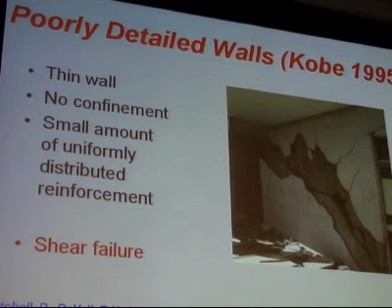So that's one type of severe problem that was very prevalent in the construction of many shear wall structures in Canada in the 1960s—thin shear walls. The problem is they have lap splices in critical locations at the base of the wall, inadequate shear reinforcement that's typically poorly anchored at the ends, and confinement reinforcement that typically doesn't exist. Therefore you get a very poor response. Back then, they weren't really concerned about earthquake design, unfortunately.

So we've done a number of tests at McGill University. This shows the test setup we've been using. We typically have a reverse cyclic loading at the tip of the wall, and the wall is fixed at the base. Notice we're testing it in the horizontal position for ease of testing. This is post-tensioned to the strong floor, and we have guides here to prevent lateral movement.

The series we just finished involves lap splices at the bottom—the most critical section of the shear wall—of 30 bar diameters. We typically use 20M bars in these fairly thin walls, 150 millimeters thick, very symbolic of the problems in current construction. One problem with a very thin wall is there's no way to anchor the horizontal reinforcement, so typically they'd put a 90-degree bend without wrapping it around the reinforcement at the ends of the walls, which is totally inadequate.

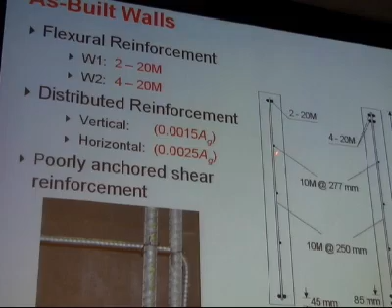We did 2 walls in the as-built condition: one wall with 2 20Ms at each end, and one wall with 4 20Ms at each end. These have the lap splices, and they have typical amounts of vertical and horizontal uniformly distributed reinforcement.

The responses of W1 and W2 didn't reach yield. If it were monotonic loading, they may have reached yield and had some ductility, but because of the reverse cyclic loading, we get a brittle type of shear failure with inadequate energy dissipation for both W1 and W2. W2 had a larger amount of flexural steel and therefore has a higher capacity, but both are inadequate in terms of performance.

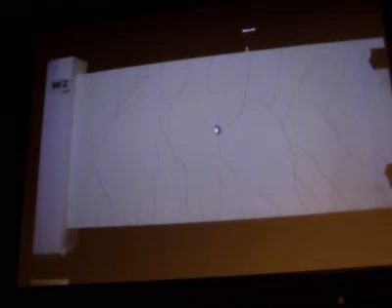Now I just wanted to show you what one of these tests looked like. We're loading up and down on the right-hand side, and you will start to see the flexural cracks forming, and then some shear cracking, inclined shear cracking, forming. Eventually we'll see the lap splice failure in this region here. It didn't move very much - it's not very ductile. So this is the brittle type of failure you get with this type of construction.

We looked at a number of ways of improving this. As I said, the walls were tested in their horizontal position, and we used carbon fiber wrap. We rounded the corners, roughened the surface, and wrapped the carbon fiber around the walls. It's a very easy solution. We did it over the probable plastic hinge region with a little bit of extra, using the carbon fiber wrap with the fibers in this direction, in strips as well, to give improved shear response.

The other type of retrofit we did was a more serious retrofit job. We took the 2 specimens that had failed under reverse cyclic loading and actually repaired them, but it also represents a retrofit procedure where we put some fiber-reinforced self-consolidating concrete over the lap splice region, adding it to the wall, not lengthening the wall, because architecturally that's sometimes very difficult to do with the retrofit. Then above this, we have the CFRP wrap and the shear straps.

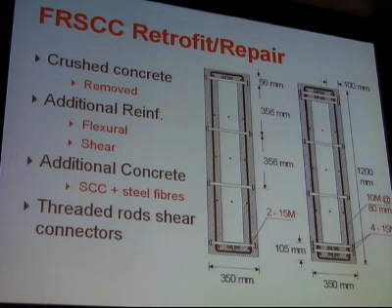In terms of the retrofit, it's quite a serious job. It involves removing some concrete at both ends, putting hoops around this area, and not lengthening the wall. This is removed concrete that's being replaced with the fiber-reinforced self-consolidating concrete. We have through bars, which give the shear connection as well, and longitudinal reinforcement, which increases the flexural strength to make this a capacity-protected zone.

We also looked at a 5-story prototype structure to be able to predict what these different retrofit scenarios would give us. This 5-story structure had 12-foot high story heights - we're using imperial units. It's 1960s construction, a shear wall frame, with deficient shear walls - thin shear walls with inadequate anchorage of the shear reinforcement and lap splices at the base and at each story. It's a frame associated with it which has limited ductility, so there again is a problem.

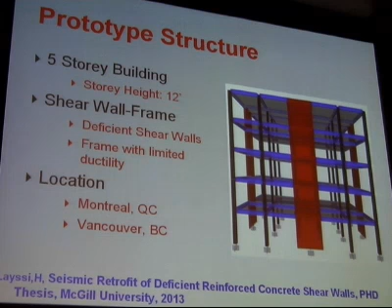We would like the walls to protect the frame. We looked at 2 different locations, putting this structure in Montreal and having the same structure in Vancouver. The wind loading, which would have governed the design back in the 60s, was fairly similar in Montreal and Vancouver, so you could have had very similar structures in those 2 cities. We used a uniform hazard spectra for 2% in 50 years for Montreal and Vancouver, as well as the 10% in 50 years, to look at different performance requirements from the walls for different seismic hazard.

The conclusions from these analyses: we did the nonlinear static procedure, which involves a pushover analysis. It's nonlinear, using the fiber models, and we also used nonlinear dynamic procedures with a suite of 12 earthquakes for each analysis. The results are rather interesting, and it worked out rather neatly.

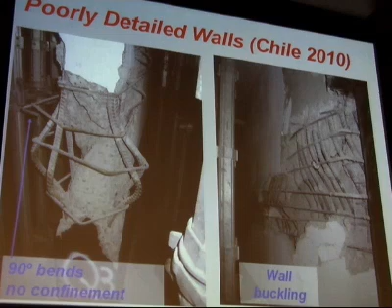And the walls that we examined varied from 175 millimeters to 250 millimeters. You cannot put confinement reinforcement in a wall that's less than about 200 millimeters. It's just impossible—you'd have to have a jeweler make the cage to put a confinement reinforcement cage in at the ends of the walls.

So these are the details that existed in Chile: there's no confinement reinforcement, and there's the 90-degree bend anchorages. And this is what we would use for our very ductile walls in the CSA standard, having confinement and having this horizontal shear reinforcement well anchored in a confined region.

This takes me back to a building that was being evaluated in the year 2000 by an up-and-coming firm, Tipping Mar, out of California. Their problem was that they needed to retrofit this building. It has two shear wall cores—coupled walls in one direction and ductile walls in the other—but they weren't actually ductile. They had lots of problems with the detailing.

The floors are hung off the top of the building, so it's very clear that the structural seismic force resisting system is the shear walls—that's the whole meat of the structure in resisting lateral loads. So we helped this particular project by carrying out a series of tests to mimic the poor details in the shear walls and look at ways of improving those details.

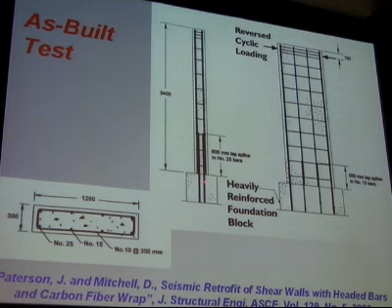So we were looking at lap splices at the bottom of the wall in this particular case, and we did two different types of specimens. The problem in the shear wall they had is that you've got lap splices at the base and at every floor level. So we were simulating the lap splices at the base with this test, and we were moving the lap splice up higher to look at this case—still in a very high moment region, but perhaps getting some yielding at the very base. So we looked at those two different scenarios with these very poor details of the reinforcement.

Interestingly enough, when you move the lap splice up a bit, you get some improvement in the response.

We were looking at this because they really wanted to make sure there were no problems with these shear walls. So we looked at retrofit procedures. In this case we weren't using self-consolidating concrete or fiber reinforced concrete, but we were looking at a reinforced concrete addition at the base over the lap splice length.

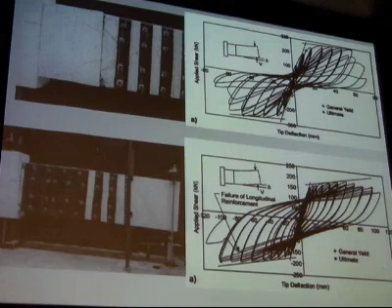That was a very interesting project to work on, and this now appears in the current draft of the 2014 CSA Standard Design of Concrete Structures, in Clause 21, which gives the recommended details for reinforcement for different ductility levels.

So thank you very much for your attention.

Our code is going more and more towards displacement-based design for concrete shear walls, and therefore you need to estimate what your displacement demands are. To do that, typically we use a linear dynamic analysis, and we need to use an appropriate flexural rigidity to account for cracking. This is an expression that's been around for a long time, and when I first looked at this subject, I thought it was a great expression. Actually, Tom Paulay came up with it, and it's currently used to analyze buildings and to estimate displacements.

So, using about a 30% reduction. What's happened there? It's coming back now, I guess. Is it? Dennis, you've stopped the stopwatch, have you? Oh, no, I haven't.

Anyway, so you're typically using a 30% reduction on the flexural rigidity based on an uncracked shear wall. So you're using 70%. That's a very typical number that we're using today.

And we've done quite a bit of work on this. In fact, a lot of the work I'm going to show today comes from Ehsan Dizdar, who's actually sitting in the room here. Put your hand up, Hassan. A lot of the work you'll see here is actually coming from Ehsan.

So hopefully this isn't going to keep happening, is it? I keep hearing there's like a tone or something. I see this is the first time we're using the other laptop. Is that the problem?

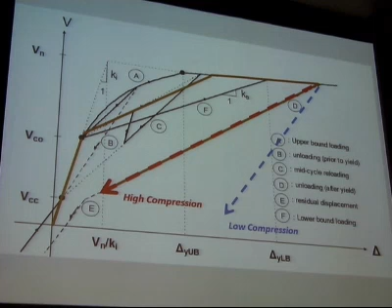But if you look at the full response, and in particular the hysteretic response, what happens is a wall with high axial compression has very little energy dissipation, because when you take the lateral load off, it stands up straight. Whereas if you've got lower axial compression, you dissipate more energy. You get more hysteretic damping. And that turns out to make a huge effect.

Any idea what's happening, Stanley, or no? I don't know. Yes, Tony. Nope.

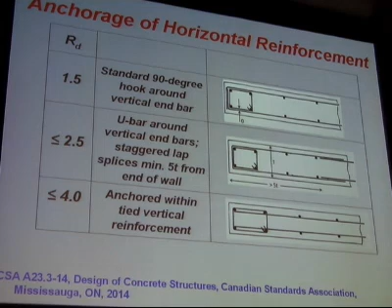Sorry? Yeah, okay, I won't miss that part at the end. There's a bit on rocking foundations. Okay, thanks, Liam. Actually, Liam, all the work I've done is original work. What did you just say? It's oh, right, the rest of it's not very original, just original. Thanks for that, Liam. No, I don't. No, there's no video, there's a few tiny animations, but one I just... No, I can't be doing the problem, right? You want me to load it up anyway,

Just in case, yeah, copy it on there. Maybe I'll just start with yours. Sorry? Yeah, we can work like that. Sure, people can see it, right? So it works better if we just stay like that? No, it doesn't, it does the same thing, right? Yeah, let's switch to Dennis here. Can you switch it to his computer?

Okay, so let's hope for the best. Thanks, Dennis. So you can start the clock again.

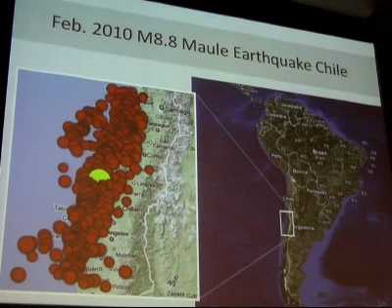Okay, so Dennis talked about some of the observations from the Chile earthquake, and I'm going to talk, as I said, a bit more about some thin wall failures.

Here's an example of one that's really a column/wall, but it was thin, and these are typically 150 millimeters, a lot of them. There's another one that failed at the end of a shear wall, crushing all along the end of the wall, and here's another example.

So as Dennis already mentioned about the lack of confinement and anchorage issues, but as I said, I want to focus on one failure mechanism, which I believe is very important, which is flexural compression failure of these walls.

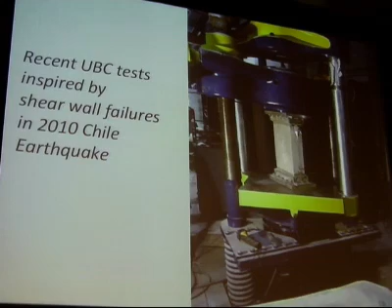And these were some little tests we did at UBC, and this is what the specimens looked like. I just want to focus in on two of them, the type 3, which has some very nominal ties, not what you would call confinement ties, but very light ties, the kind of thing you'd put in a non-seismic element, just minimum column ties.

And the type 2, which doesn't have anything connecting the two layers of reinforcing steel. There's two layers of small bars in a 150 millimeter wall, which is what we saw in Chile.

Here's exactly what you might expect. The type 3 elements respond like a concrete cylinder. You get out to strains of 4 parts per thousand before it finally crushes, and even then it's quite reasonably ductile.

So very nominal ties, very light ties, make it behave like we'd hope. These elements are in pure compression. Here's a type 2 element, which we've started to load up, and there's none of these nominal ties. We get up to this point, so far everything looks great. We're up to 30 MPa average stress on these elements, so we're getting close to the peak compression strength.

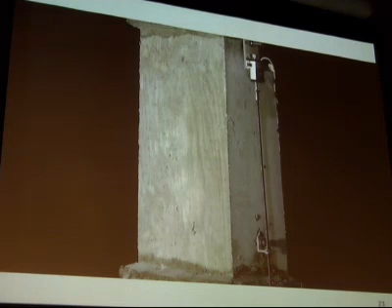Here's what the element looks like. If you look closely, you can see a little bit of damage at the middle there, but all of a sudden it completely explodes. The first time we saw that happen, I thought there was something wrong with the test setup, but when we saw it happen many times, we realized there really is a phenomenon here.

Now we've also done a study on columns and walls. These are gravity columns and gravity walls, these are the four column specimens. We also did a fifth specimen like the bottom one, but without the cross tie, so it's a wall. If we look at the top two, I was surprised to see how tough these gravity columns are. These are gravity columns with nominal gravity ties, not seismic detailing, and we couldn't break them.

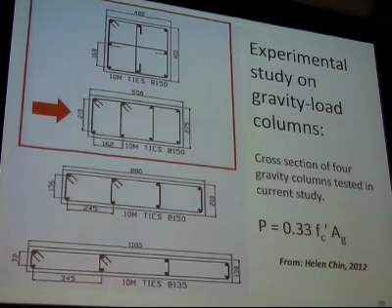If we focus on this column and look at what our predicted displacement capacity was, it was much greater in the experiment. Essentially, we couldn't break it. We crushed all the concrete on the outsides, but it still carried the load, and it had a heavy load, 33% of F prime c Ag.

The reason it works so well is because in this middle zone, you can crush all the concrete here and here, but this middle zone, which has some nominal ties around it, continues to carry the gravity load. So we were really surprised at how good some of these gravity columns can be, and that's of course great news.

But these elements have a certain dimension, like the square ones, or rectangular shapes where it's no more than 3-to-1. Once you get to the slender walls, once you start getting to 4-to-1 or 5-to-1, it's a completely different animal. And what we see happening in those is exactly what we saw happening in those little element tests.

Here's an example of the wall specimen. We're loading it up, a little bit of damage, and all of a sudden it goes bang and it's gone. Complete load capacity is gone, and the failure mechanism is exactly like that element — it goes right through the thin wall and completely loses all its axial capacity.

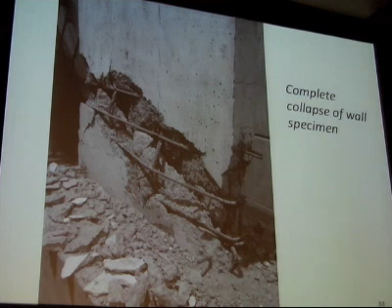To me that's a big worry, because as Dennis mentioned, we've got a lot of these thin walls around, and even today people are building 6-inch walls in Vancouver in high-rise buildings as columns. It's not unusual in Vancouver — not every engineer, but some of them are.

Here are some of the changes we've made as a committee to address this issue. Number one, in Clause 10, we've reduced the axial compression capacity of thin elements to reflect that failure mechanism I just talked about. So with thin elements, you don't want to be loading them up too high. Right now people are loading them up much too high because they don't have the toughness.

The other thing we've got to be really careful of is limiting the compression strain. I'm actually not a big fan of confinement. A lot of people think you've got to confine everything, but I think you just need to avoid the large compression strains, and then you don't have to confine it. If you're going to have high compression strains, you've got to confine. If you keep the compression strains low, then you don't actually need to confine.

Significant. You do need, as Dennis showed, some sort of nominal ties at the end - that nice diagram Dennis showed at the end there.

The other thing we've got to watch out for is because we have a lot of thin walls in buildings that people call bearing walls, I worry about those failing in a seismic event. So that was thin walls.

So Dennis, how much time do I have? I've got to figure out... Okay, I think I got another 20, right?

So this is just a quick topic so that Patrick and I can have a debate over lunch. This is a topic that Patrick and I have discussed, and it's an interesting one. Five to six years ago, when we were starting work on the code, I thought the biggest job we had to do was change the whole philosophy of how we design shear walls.

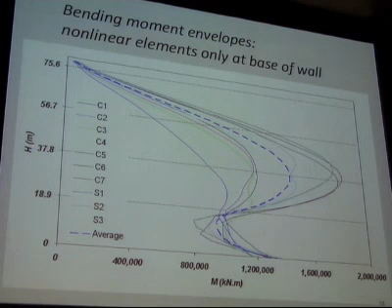Five or six years ago, I thought, boy, we really have to change the code because we're going to develop hinges at mid-height, and that's a problem.

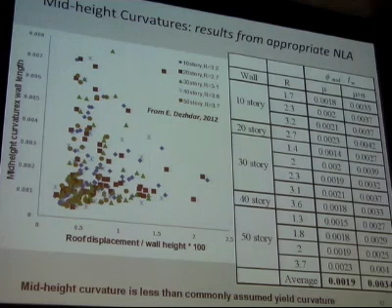This is a bunch of data, again, from Ehsan, where we're looking at curvature demands for all different buildings. This value of curvature times wall length, this is what we assume to be the yield curvature for the wall. In other words, most of the data is below what we assume to be the yield curvature.

And in fact, if you look at the table on the right, for the mean plus 1 standard deviation result, the curvature times wall length is less than a typical assumed upper bound yield curvature. So the summary is that, in my opinion, we don't need to provide special detailing at the mid-height of the shear wall, and in fact we haven't added that. We do need to be careful primarily about these compression failures. This relates to what I talked about earlier, that we don't want to have large compression strains in the wall. Some people advocate the idea of actually preventing the yielding, and I'm actually against that. I think a little bit of yielding at mid-height, at small curvatures, is a good thing because it helps reduce the shear demands.

And speaking of that, I'll go to design shear forces very briefly. Our design shear force is our elastic shear force multiplied by a couple of things. Essentially, we adjust the shear force based on the bending moment. We use the same reduction factor as we do for bending moment. And then we amplify our shear based on the actual bending strength. That's something we've had in the code for a long time here in Canada, and it's very good.

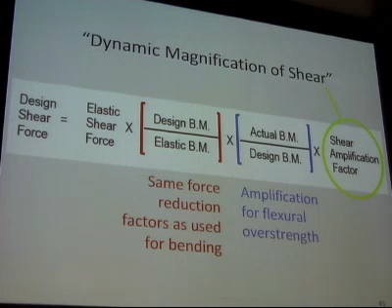But there's another factor, an amplification factor to account for the fact that the higher mode shears aren't linked to the flexural capacity. A lot of people have done work on this, including Patrick and Robert Tremblay. I don't know if he's here yet, but Robert's done work on this. And many people have different solutions. My own conclusion is that a lot of the suggested amplification factors are too large because people have used a bad model and have used the wrong selection and scaling of ground motion.

Here's an example, again, of the shear envelopes you get. The red line is the shear envelope from an elastic, perfectly plastic model. The blue line is what you get if you just simply use a trilinear model. So you get a significant reduction in the shear due to the cracking, flexural cracking that occurs near mid-height.

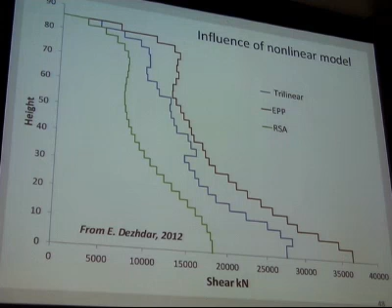First of all, we've seen very few shear wall failures in actual buildings. The higher mode shear forces exist for a very short time, and by the time something starts to happen, the shear force turns around. Nonlinear analysis has shown that walls have shear ductility, and we've seen that in a number of studies. An important point is that the maximum base shear force and the maximum base rotation, and the base rotation reduces shear capacity, they don't happen at the same time. The largest shear force we're looking at happens once in an earthquake; the next cycle, or the next highest shear pulse, will actually be significantly lower.

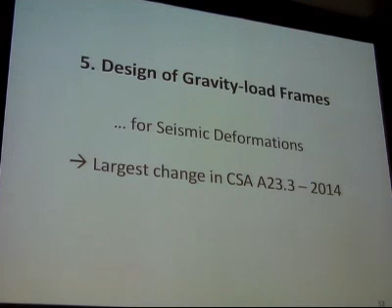Here's the biggest single change we've made in the code: a new section on the design of gravity frames. One of the things we've done badly in seismic design of buildings is identify a piece of the building, the wall, as the seismic force resisting piece. We do a really good job designing that wall and making it ductile, and the rest—well, that's the gravity load system, so let's not worry about it, since it's not carrying the earthquake forces.

The problem really comes from thinking in terms of forces. If it was a force problem, that would all be great. But here's a beautiful example.

We need to think about the displacement demands on the gravity frame system. We've done a lot of work on that for our Canadian code—we have a large new subclause dealing with this issue, and there's more work to be done. One important thing is getting a simple estimate of the displacement demands on the gravity frame, and we're doing that using the interstory drift demands.

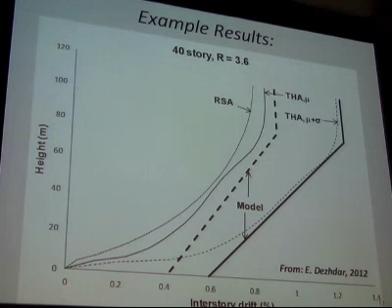Here's an example of Ehsan's work where nonlinear analysis shows what these interstory drift envelopes look like, both the mean and the mean plus standard deviation. We've used these results to come up with a simple bilinear variation of interstory drift. At the base, the envelope comes to a significant value, even though results show very little drift at the base when only modeling flexural deformations. The difference comes from shear deformations, which are very significant in a hinge—you get a lot of interstory drift in a plastic flexural hinge due to shear.

So what we've got in our code is a simplified method of analyzing the gravity frame using this simple interstory drift ratio envelope defined in the code. You come up with it quickly using a linear dynamic analysis with effective flexural rigidity, accounting for things like torsion and accidental torsion, and now including foundation movements. This is really important: any movement in your shear wall foundation probably won't hurt the shear wall much—it's just going to rotate over—but it will put huge demands on the gravity frame.

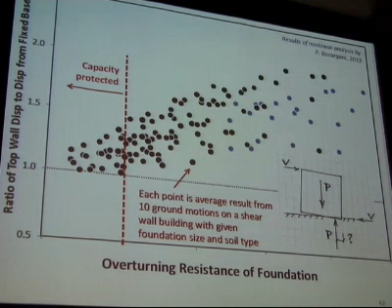What surprised us was that capacity-protected foundations—where the wall is made weaker than the foundation—still give very significant movements. Of course, if you let the foundation rock, not protecting it through hinging of the wall, you'll get even larger displacements. In our Canadian concrete code, consistent with the draft 2015 NBCC, there's a statement that the increased displacements due to foundation movements shall be accounted for in the design of the SFRS, and perhaps more importantly, in the design of the gravity load frame. That's in our Canadian concrete code as well as the NBCC.

And now, how do you calculate those displacements? I'm not going to spend much more time on it, but I'll tell you we've been spending a lot of time coming up with simple ways to do that.

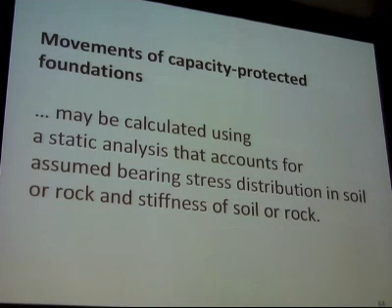So for capacity protected foundations, what our code says is you can use a simple static analysis that accounts for the bearing stress distribution and the stiffness of the soil or rock.

And I'll stop there. There's a little bit more about rocking footings, but I'll end there because I'm taking at least my time—sorry about that, Dennis. No, that was great. Sorry about the mechanical problem.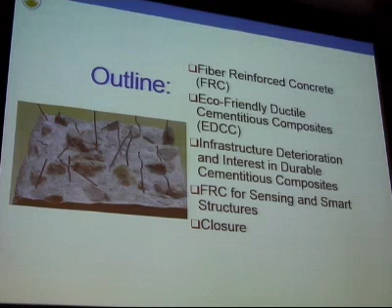So fibers that go into concrete are of several types: steel, polyester, high-density polyethylene, cellulose, carbon, basalt, and the list goes on. There are a number of fibers that are produced—it's a huge industry, almost about 500,000 metric tons of fibers utilized in concrete these days.

You can also produce SIFCON. SIFCON is a material where you produce a bed of concrete, then add a bed of fiber, and then pour cement slurry. The defense industry uses a lot of this material because it's a highly energy-absorbing material.

And finally, you could also produce it by the spray process. This is how a lot of GRCs, glass reinforced cement products, are made. A number of buildings on the campus have GRC cladding, so this is how these materials are actually produced.

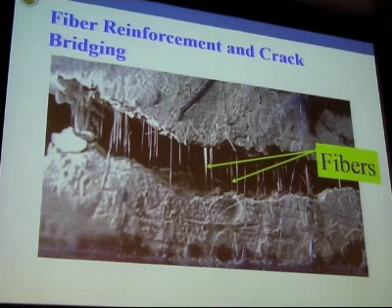The crux of the matter, the primary mechanism by which you can make a material absorb a lot more energy, is the fiber bridging effect. If you have concrete without fibers, once you have a crack, it would have very low stress carrying capacity. The moment you have fibers in there, you have a stress carrying capacity across a crack, which we call a residual tensile or residual compressive capacity. So you get this kind of response.

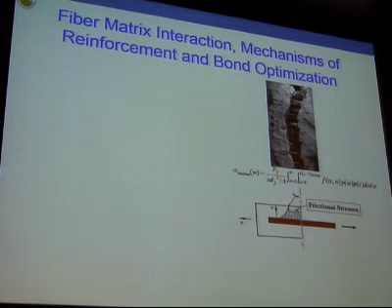Because you're trying to reduce or maximize its pull-out capacity, while making sure the fiber doesn't fracture in the process, a number of models have been created to analyze these fibers. A number of patents have also been generated for designing fibers which pull out at the highest resistance but do not fracture in the process.

A fair bit of work has also been done on the surface chemistry itself. If you look at any particular fiber, it would have a very high contact angle with water. What we're trying to do is coat these fibers to reduce that contact angle, making the fiber highly hydrophilic. When a fiber becomes hydrophilic, it absorbs a lot more energy and achieves a better bond. You can see these polypropylene materials which have been treated with plasma, which can reduce the contact angle quite substantially.

Over the last 30 years, a number of new techniques have been generated to increase the performance of one single fiber, so it pulls out at a very high force without fracturing. Other methods include fiber deformations, silica fume use, surface modification, and surfactant use. These studies have allowed us to generate fiber reinforced concrete materials with the type of characteristics I call an elastoplastic response.

So if you look at all of the work that has gone into generating fiber-reinforced concrete or optimizing these materials, 30 years ago we would have had a softening response, or a deflection softening response. But by understanding the mechanisms of these materials, what we can now get is what we call a strain hardening response, so you can get a material which almost behaves like steel.

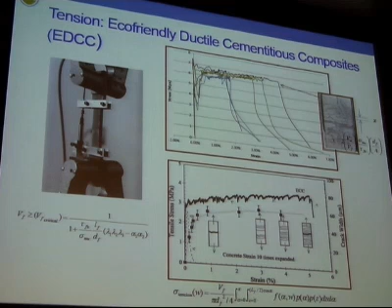Cement, as you know, is a very dirty industry, producing up to 7% of global greenhouse gas emissions. So in these composites we are trying to reduce cement as much as possible. Clearly, these are quite eco-friendly, and they are also highly ductile.

Now, coming to earthquakes, and how we fit into this understanding of strain rate effects in concrete. If you look at what happens during loading: quasi-static testing is around 10 to the power minus 6 strain; traffic is 10 to the power minus 6 to minus 4; gas explosions and earthquakes, which is what we are dealing with here, generally have a strain rate between 5 times 10 to the power minus 3 to 5 times 10 to the power minus 1.

So you're looking at possible strain rates up to, say, 10 to the power 3 greater than the quasi-static rate. I want to impress upon you today that when you're looking at strain rates that high, the traditional understanding of concrete does not really apply.

What you need to understand is the strain rate sensitive models that apply to concrete, steel, and other materials. Explosion and terrorism scenarios may actually have a strain rate approaching almost 10 to the power 1.

So how do we understand how these materials, or fiber-reinforced concrete, behave under high rates of loading? There are several methods available, including the split Hopkinson pressure bar.

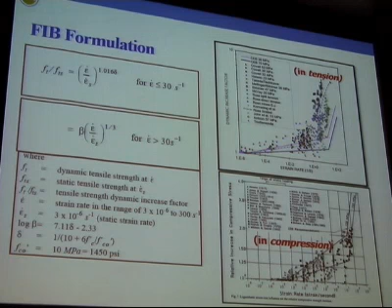Typically, what we understand is that these materials are highly sensitive to rate, and this is a synopsis of hundreds of test studies that have been performed. When plotting a response versus strain rate, you'll see it performs in a bilinear manner, with a knee in the curve, and your earthquake loading is somewhere just before or just after that knee, just before it becomes highly sensitive. There's been a fair bit of work done on these materials under high rates of loading.

That means I'm not able to absorb under those high rates of loading similar energy as I would have absorbed under slow rate loading, which is a cause for concern. We need to go back to understanding micromechanics better, develop better fibers which can continue the strain energy absorbing streak further, and not see this brittle response coming at approximately 1% strain, whereas I can actually strain this other material under quasi-static conditions to 5 to 6%.

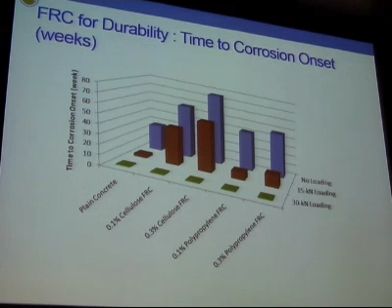Fiber-reinforced concrete is a very durable material because of its crack control capacity. You can actually get a lot more years out of a structure as a result of fiber use. This is also true on the repair side - if you're repairing these structures with fiber-reinforced concrete, one can easily predict that you would get a lot more life out of the structure.

That brings me to the last topic. When you have structures which are highly deteriorated, how do we create a scenario where these structures can talk back to us? When they can talk back, you can understand what the condition is and how far we are from approaching a certain collapse state. In other words, what we're looking at is putting sensors on these structures.

So you have this typical bridge. You can put certain sensors on it which can then correspond or interact with us over the internet. You can do sensing, data acquisition, data processing, communication, damage detection, and then modeling and interpretation. Fiber-reinforced concrete, if utilized in structure, is a smart material, and I want to show you that you can actually get significant amounts of data by understanding what fiber-reinforced concrete can do.

Here are some other sensors that we are using on structures - I'm sure many of you are familiar with this. But what I'm going to talk about is a fiber-reinforced concrete type sensor, what we call a cement-based sensor, which generally carries carbon nanotubes. So you have these materials which have been stressed, and we're trying to generate a sensor out of these.

The sensor data is predicted using impedance. These materials become highly conductive, and when you pass a current and put stress on that conductive material, its impedance changes. What that means is if I have a material with, say, multi-wall carbon nanotube, a material with very high conductance or very low resistance, and as I put a certain stress on it, that material becomes extremely sensitive because its impedance changes as a result of change in stress level - which is what we call piezoresistivity.

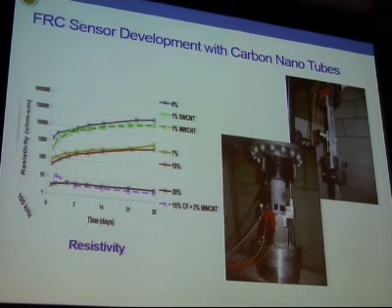So in effect, if you have a structure subjected to a cyclic load during an earthquake, for example, and I have a material this structure is made of, if I'm monitoring its resistance or its change in resistivity, this signal from the material itself will mimic exactly what the structure is saying. This is wonderful because now I can just monitor the material, and it will tell me what actual load is being carried, over the internet or through some kind of measurement device. You can understand quite a bit about how the structure is actually performing.

Just to give you a brief view of where these sensors have gone, this is the Provencher Bridge in Winnipeg, Manitoba, which is carrying some of these sensors now. This is the actual control room just under the bridge, monitoring how the bridge is responding to traffic. We can clearly see if we are closer to some kind of disaster, or closer to the capacity of any element, and these sensors will quickly tell us what the state of the structure itself is.

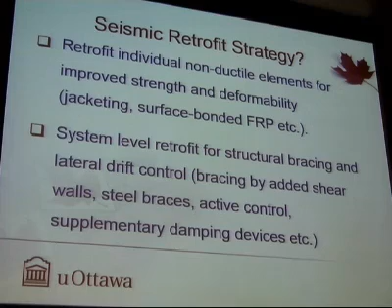As you know, seismic retrofit strategy can be implemented either at the element level or at the system level. If you have few substandard elements lacking strength and/or ductility, it makes sense to retrofit these individual elements—typical examples being columns, beams, walls, and beam-column connections. But if you have a number of such non-ductile elements, it makes sense to brace the entire structure, limit lateral deformations, and this also helps control non-structural damage.

The research projects I will talk about are mostly within the scope of the Canadian Seismic Research Network and involve both types of retrofit strategies.

We all know that columns play an important role, whether it's buildings or bridges, and first-story columns in a building or bridge column are responsible for overall strength and stability of the entire structure.

Typically columns suffer damage due to lack of transverse reinforcement. Here you see not enough transverse reinforcement and hence not enough diagonal tension capacity. If you do not have sufficient transverse reinforcement, especially in highly axially loaded columns, then you do not have the ductility that you wish to have in concrete, and lack of confinement provides another deficiency.

Thirdly, lack of sufficient longitudinal reinforcement splicing causes a problem. In old bridge practice, lap splice lengths were reduced to as low as 20 times bar diameter, and these happen to be in potential plastic hinge regions, obviously creating problems.

So the first retrofit project I will talk about involves use of FRPs, fiber reinforced polymers. Nowadays it's widely accepted in the construction industry to use carbon fibers and glass fibers and wrap columns for all of those three deficiencies that I talked about.

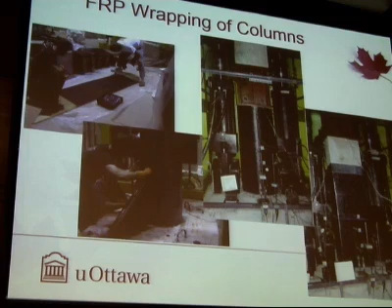The important point I wish to make here is the importance of axial load, which distinguishes bridge columns from building columns. Typically bridge columns are subjected to about 15% of concentric column capacity in terms of axial load—they're essentially bending elements. In these columns, if you provide transverse fiber wraps, you're not really using the potential of these fibers, and columns fail through other mechanisms prior to reaching the strength of the fibers.

Here's an example of a square bridge column retrofitted with fiber jacketing, and it was able to reach 4 to 5% drift.

Here is a building column subjected to 35% of P naught, typical of building column axial load level. Here we were able to rupture the transverse reinforcement.

Previous design approaches did not consider axial load as a parameter for FRP jacket design. Hence a displacement-based design methodology was developed as a function of axial load and lateral drift capacity, and has been incorporated in CSA standard S806 in its 2012 edition.

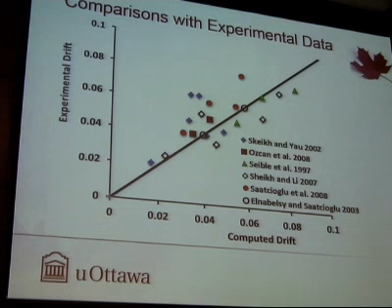Now the second technique I would like to talk about is transverse pre-stressing of columns for enhanced strength and/or deformability. As we know, pre-stressing is not normally done in the transverse direction, but this application is intended to introduce active pressure over and above the passive pressure we introduce through existing transverse reinforcement.

The technique can be implemented in one of two ways. Firstly, we can use 7-wire strands and wrap the strands around the column with ring anchors and pre-stress them to induce lateral transverse pressure.

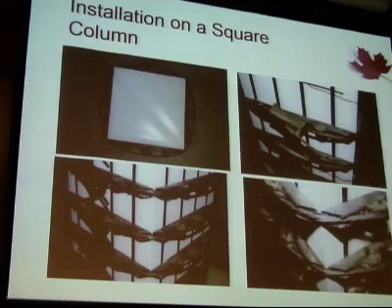In the case of square and rectangular columns, in order to take advantage of hoop tension, one needs to provide these razor elements. Eventually you have to cover it by shotcreting or provide some sort of column cover, not only for aesthetic reasons but also for protection against corrosion.

Here are some column specimens that have fiber reinforced covering on them, essentially shotcreted on concrete, and they went as far as 7% drift before the cover started spalling off. Here are some examples of the improvements attained from this technique.

Here you see a shear dominant bridge column. Typically shear dominant columns, if they do not have sufficient transverse reinforcement, cannot exceed 1% drift, which is not sufficient during earthquakes.

But if you did apply this transverse pre-stressing, you could go over 4% drift. The level of pre-stressing depends on the type of performance you expect. If you want a crack-free column after a reasonable magnitude earthquake, literally without any cracking, you can increase your transverse compression, which would overcome cracking of the concrete.

But subsequently, as cracks start increasing, the pre-stressing kicks in as additional transverse reinforcement. So it provides two functions: it improves the V sub C term, the concrete's resistance to diagonal tension, and it also adds additional steel against shear.

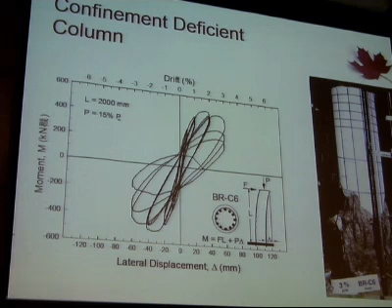This is a comparison of confinement effectiveness of combined active and passive lateral pressure. Here's a bridge column, a circular column, able to go up to 2% drift. Unlike what we think, reinforced concrete has inherent deformability - this unconfined column went up to 2% drift, but at that point the cover started spalling off and the reinforcement rebar started buckling. When we retrofit with transverse pre-stressing, performance improved - deformability went over 4% drift, and damage on the column was extremely limited.

Now, the third application is for inadequate splice regions. Here's a bridge column with typical pre-1970s practice, with 20 times bar diameter splices located in potential plastic hinge regions. Beyond 1% drift, bars started slipping - you could see the pinching in hysteresis loops, and there was strength decay. An application of transverse pre-stressing improved bond between steel and concrete and enhanced performance.

By the way, in our CSA standard for FRP applications for square columns, use of FRP to control bar slippage is not permissible, because you don't get similarly good behavior - you only rely on passive pressure and cannot mobilize the entire hoop tension in square columns. Hence this technique has superiority in that regard.

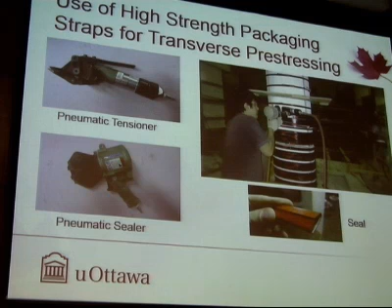More recently, because of the special skills required for pre-stressing columns, we tried using high-strength packaging straps to simplify this procedure. After all, we need lateral pressure and high-strength steel. The packaging straps we typically use have up to 800 MPa strength, and come with handheld devices - you can pull them and pre-stress them, then use seals to anchor them.

In the case of square and rectangular columns, instead of using steel razor discs as before, this time we use precast concrete units, converting square columns to circular sections and rectangular columns to elliptical shapes. And we got tremendously good behavior.

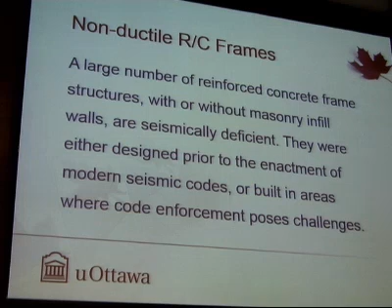Now I'd like to talk about system level interventions. We have non-ductile reinforced concrete frames with and without masonry infills, and I'll refer to some projects involving converting non-ductile URM into a shear wall within a reinforced concrete frame, and we'll also talk about load-bearing masonry walls. For bare frames, a conventional way of retrofitting is either to fill with a reinforced concrete shear wall or provide steel sections as steel bracing.

We have been researching use of pre-stressing strands in the diagonal direction, so that initially they're both in tension. As the frame sways in one direction, the tension side becomes under increased tension, whereas the compression side starts unloading, transferring load resistance from one side to the other, improving effectiveness of the pre-stressing strand. These are 1600 MPa 7-wire strands, and we got quite a bit of improvement. We looked at single 7-wire strand, double 7-wire strand, pre-stressed up to 100 kilonewtons, corresponding to approximately 40 to 50% of rupturing strength.

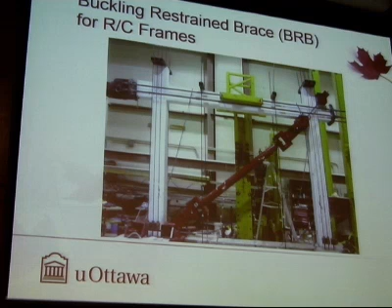This is ongoing research, so I will only show this picture. We have not yet assessed the results, but we did do one test and are in the process of doing another. We tested one typical of Ottawa seismic level, using regular strength steel, and now we're testing one for twice the load, presumably representing a building in Vancouver. The results will have to be assessed and made available later.

Now I'd like to say a few words on masonry research, first starting with infill walls, then masonry alone. We have done some research on use of surface-bonded carbon FRP sheets on infill masonry. The intent was to convert this non-ductile infill masonry wall into an equivalent shear wall that would act along with the enclosing frame, which requires a lot of anchoring.

Obviously when you use surface-bonded, surface-mounted FRP, a very high-strength material, on masonry, which is low-strength, relatively low-quality material, there's an incompatibility problem, and bond becomes a significant issue. We had to come up with homemade FRP anchors and used them to improve continuity.

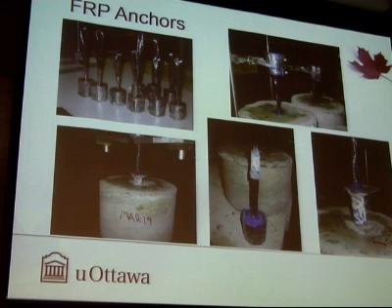Here you see FRP anchors, essentially twisted anchors cut from FRP sheets and inserted into holes, providing continuity between surface-bonded FRP and the enclosing frame elements. We had to do a special separate study on FRP anchors and came up with a design methodology considering inclination of these anchors as well.

There was much debate on the cost of this type of application, so we tried to minimize use of FRP. Since then, FRPs are becoming reasonable in cost, and we used only along diagonal tension, so X-bracing was the application. Everything else remained the same.

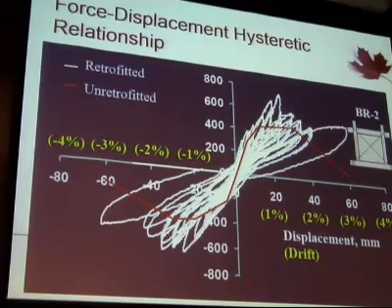We also extended diagonal pre-stressing methodology to reinforced concrete walls with infills. This time infill was brick masonry as opposed to block masonry, and we again got quite a bit of improvement in strength and some ductility, because these pre-stressing strands being steel introduces some ductility.

Now I'd like to go into individual load-bearing walls. The first one being reinforced concrete shear wall, isolated wall, then unreinforced masonry and partially reinforced masonry, and talk about the technique of retrofitting them using steel strips.

Further improvement was attained when we provided strips by means of through bolts along the diagonals as well.

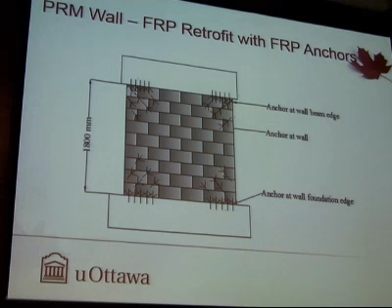So we essentially wanted to have diagonal elements in FRP, and then we also wanted to connect vertical FRP to the foundation for flexural strengthening, and hence we used the same anchors in the way it is shown.

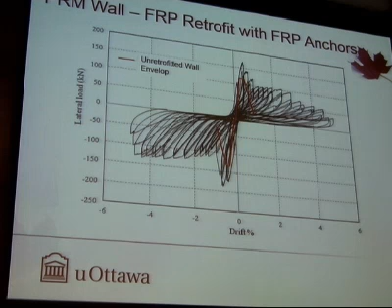The first application involved using anchors in a diagonal direction, provided with 30-degree inclination, so they would take tension in their longitudinal direction, as well as anchoring them into the foundation. We did get improvement in this wall test under reverse cyclic loading, but unfortunately the anchors were not placed right—the vertical anchors were supposed to be at least 2 inches or 50 millimeters, and they were short of that. So the improvement in flexural strength was not as significant as hoped, but diagonal strengthening was quite significant. The red envelope curve indicates overall resistance in shear, and there has been quite a bit of improvement due to control of surface cracking.

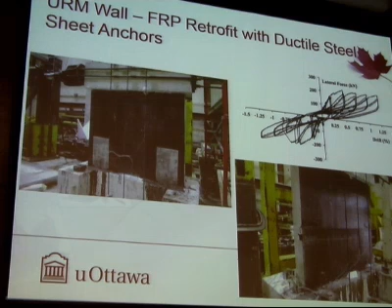So we took these steel plates, inserted them into the foundation after cutting it, and epoxy glued them. We also added through bolts, small threaded rods, to control buckling under reverse cyclic loading. Here you see the application on the left-hand side, the plates inserted on the right-hand side, and a final layer of FRP covering them. There was quite a bit of improvement in both strength and ductility. This was originally an unreinforced masonry wall—completely URM, whereas the previous one was partially reinforced. You can see the tremendous improvement in strength and ductility attained with these plates.

This is all I have to say. Thank you for your attention.

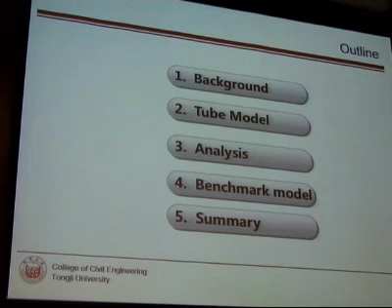As you all know, collapse resistance design prevents structures from collapsing, but after strong earthquakes the structure is difficult to repair and the repair time takes long. Earthquake repairable design, however, prevents structures from collapsing and concentrates the damage, so after strong earthquakes the structure is easy and quick to repair.

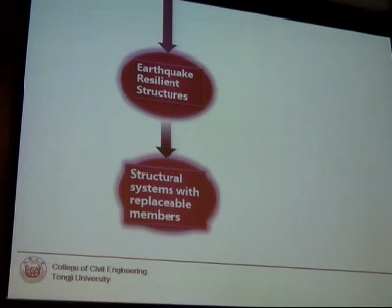Under earthquake repairable design, earthquake resilient structures have emerged, and the structural system with replaceable members is a typical type of earthquake resilient structure. It is a type of structure in which replaceable members are installed to concentrate plastic deformation and dissipate earthquake energy, while the rest of the structure remains intact. Through this method, the use of the structure is not affected, and the whole structure regains full capacity after replacement.

Up to now, researchers in this area have focused on bridge systems with replaceable coupling beams and replaceable members, frame systems with replaceable members, and also shear wall systems with replaceable members.

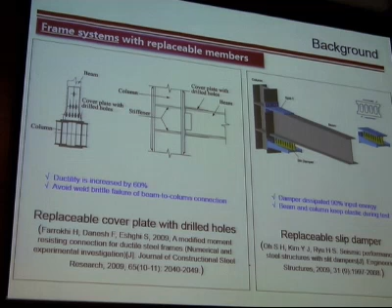Next is the frame system with replaceable members. On the left is a replaceable cover plate with drilled holes in a steel frame; this cover plate can avoid weld brittle failure of beam-to-column connections, and research shows ductility is increased by 60%. On the right is another beam-to-column connection using a replaceable slip damper, which could dissipate 90% of input energy while the beam-to-column connection remains elastic during testing.

It's a link column frame system, which is actually a brace system, and the linked column acts as a brace. The link column consists of replaceable links and dual columns.

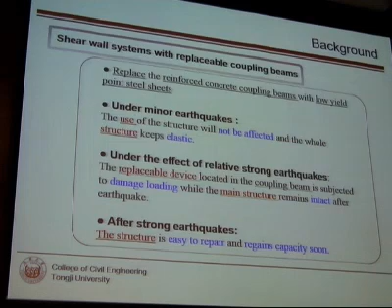Then I will show you the simple tube model. It's a 5-story model with replaceable coupling beams. The replaceable coupling beam is divided into the yield section in the middle and the non-yield section at the ends. First we designed the ordinary reinforced coupling beams.

For comparison, we designed two groups. For group A, the span to depth ratio is 5.3, and for group B, the span to depth ratio is 1.6. According to this design principle, the moment resistance and shear resistance of the non-yield section equal that in the ordinary coupling beams, and the moment resistance of the yield section equals that in the ordinary coupling beams, but the shear resistance of the yield section is less than or equal to that in the ordinary coupling beams. Then we designed the yield section.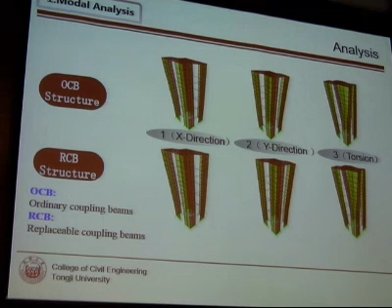The yield section is made of steel with low yield point to concentrate the deformation. First, modal analysis was conducted, showing the mode shape of the OCB structure and the RCB structure is the same. From the natural vibration period, we can see there is an increase of natural vibration period in the RCB structure, but compared with group A, group B structures exhibit a smaller difference.

Then the partial analysis showed the damage is concentrated in the yield section of the replaceable coupling beams, but the non-yield section of RCB keeps intact.

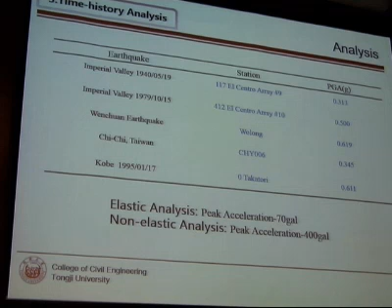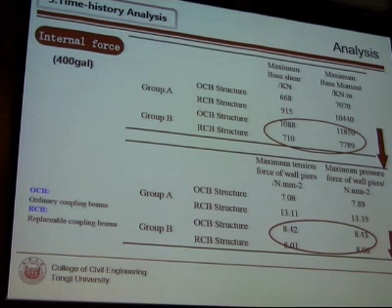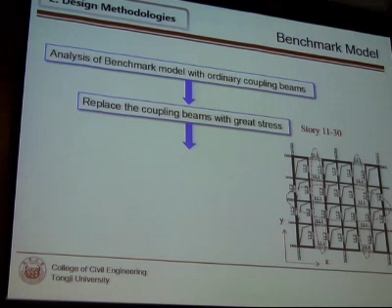Then the design methodology is below. First, we do analysis of the benchmark model with ordinary coupling beams, and then we replace the coupling beams with great stress. In this case, we replace the coupling beams in stories 11 to 30, replacing all the X direction coupling beams, but just the middle column of coupling beams in the Y direction. Then we design the replaceable coupling beams according to the design principle I talked about before, to get the benchmark model with replaceable coupling beams.

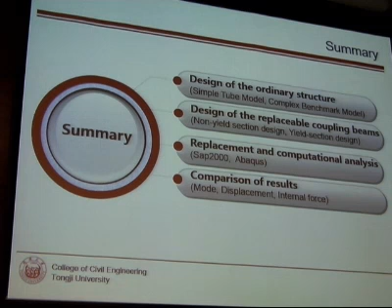Finally, it's a summary of my report. First, we design an ordinary structure with a simple tube model and complex benchmark model. Then we design the replaceable coupling beams with a non-yield section and a yield section. Then we do replacement and computational analysis with software, SAP2000 and Abaqus. Finally, it's a comparison of the results of mode, displacement, and internal force.

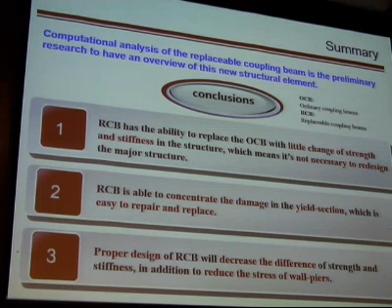Computational analysis of a replaceable coupling beam is preliminary research to have an overview of this new structure element. From the analysis, we can conclude: first, RCB has the ability to replace the OCB with little change of strength and stiffness in the structure, meaning it's not necessary to redesign the major structure. Second, RCB is able to concentrate damage in the yield section, which is easy to repair and replace. Third, proper design of RCB will decrease the difference of strength and stiffness, and also reduce the stress of wall piers. Thank you very much, and welcome to discussion.

Well, thank you very much. You're our first speaker that we've had time for a question, so that was well done. I was the worst, and you're the best so far. So we have time for a quick question if anybody has one.

When you modeled the building, did you include the floor slab? Did you model the fact that the floor slabs are rigid, or did you ignore the floor slabs? I do the coupling of the nodes in the same floor.

Okay, so you put them together. Yeah. Excellent, okay, so you're modeling. Excellent, very nice. Well, thanks again for a very clear presentation. Very nice, thank you so much.

Okay, and our last speaker is Rick Rabazi, who is going to show us some of his very interesting results on slender masonry walls. Cool.

I'll be presenting some recent research conducted here at the University of British Columbia regarding the in-plane seismic behavior of reinforced masonry shear walls. Of the various types of failure modes affecting these type of shear walls, we will focus on the out-of-plane instability failure mechanism, which was first documented by Paulay and Priestley.

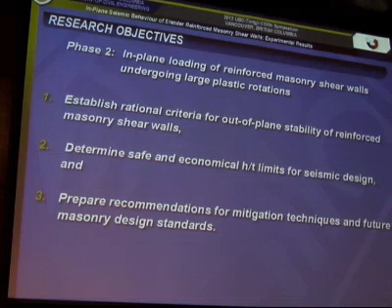So the second phase involves the in-plane seismic testing, or loading, of full-scale reinforced masonry shear walls. The goals were to establish rational criteria for the out-of-plane stability of these walls, establish good height-to-thickness ratios, both economically and safely, and prepare recommendations on mitigation of this failure mechanism, as well as recommendations for future design standards.

The two tests conducted so far were on identical specimens with geometric properties resulting in a height-to-thickness ratio of 27.1, about double the current Canadian limit on these walls, and an aspect ratio of 1.5.

The vertical reinforcement ratio was 0.33% and consisted of two 15-millimeter diameter bars in the exterior two cores of the wall, and four 10-millimeter diameter bars spread throughout the center.

The horizontal reinforcement ratio consisted of a single 10-millimeter diameter bar at every course height, so every 200 millimeters. There were two types of tests done on these walls.

The first test was meant to simulate the bottom story of a multi-story structure, requiring the use of 3 actuators, with the 2 vertical actuators representing both the axial loads and the overturning moment from the stories above. The second wall represented only the bottom story, or a single-story structure, say a warehouse, and did not require the use of these 2 vertical actuators.

The loading protocol was displacement-based and used a displacement increment which had its basis in the lateral displacement causing reinforcement yielding in the most exterior bars. All this was with a constant axial load of 660 kilonewtons.

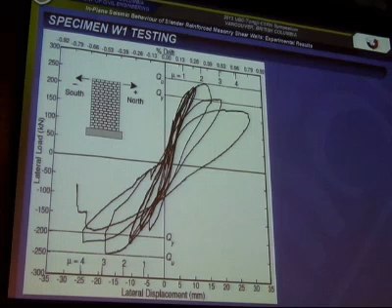Looking at the response, you can see that it's fairly elastic until we had some splitting and toe crushing at this north end. This continued on with additional face shell spalling and crushing at the toes, until eventually we had a compression failure, but it was after significant damage occurred at the toes.

Looking at the axial strains, which were determined to be quite important, we had around 2 times the yield strain in the most exterior reinforcing bars at failure.

So our key findings were that the failure mechanism was actually toe crushing. Really, it wasn't what we were looking for, but the high axial load prevented the important development of wide and uniform flexural cracks over the plastic hinge height. Even though there were high plastic tensile strains, these were quite localized in the bottom two courses of the wall, which was not enough.

So looking at the objectives for the second test, based on these findings, we found that we had to remove the axial stresses to create those uniform wide flexural cracks over the height, and in turn also increase the large plastic tensile strains in reinforcement. And of course, because we're reducing the axial load, we had to now be aware of sliding shear at the base.

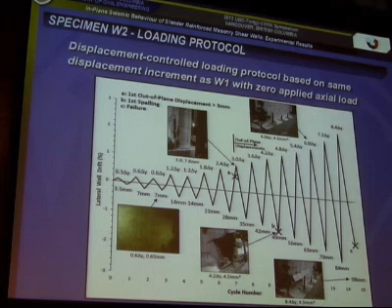So looking at the loading protocol for the second test, it was quite similar to the first test, in fact identical initially, except the much greater ductilities caused us to keep going for quite a long time. With this test, there was no axial load.

Looking at the response, it was much better. There wasn't much damage until the base sliding at the toe caused the toe to extend past the footing, which is my design error in the footing reinforcement, and caused cover spalling of the footing.

This caused some asymmetry in the response, but toe crushing continued on both sides of the toe afterward. The facial spalling actually allowed us to see the straightening of the reinforcing bars when in tension, and then the buckling of these bars when in compression.

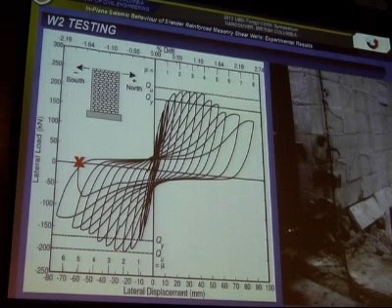This continued for a number of cycles until eventually we actually did get our desired, or at least partially desired, out-of-plane instability failure mechanism. So looking specifically, here's some pictures of the mechanism here.

Looking specifically at the mechanism itself, we can see that very early on we had out-of-plane displacements greater than anything seen in the first test, on the order of around 5 millimeters. Very soon after load reversals, these large out-of-plane displacements develop and continue until the face shells come into contact, upon which the restoring moment causes these displacements to decrease again.

Looking at the overall response, the out-of-plane displacements occur at a pretty low lateral load, which confirms the first phase's results, as well as the maximum out-of-plane displacement occurring at around zero lateral displacement, which corresponds to a low axial strain, also confirming the first phase's results.

This behavior continued for a number of cycles until the critical limit of the out-of-plane displacement, half the wall thickness, was reached, upon which the out-of-plane displacements became unstable.

Looking at the axial strains, we can see that again they go up to around 5 times the yield strain in the most exterior reinforcement, quite a bit more than the first test.

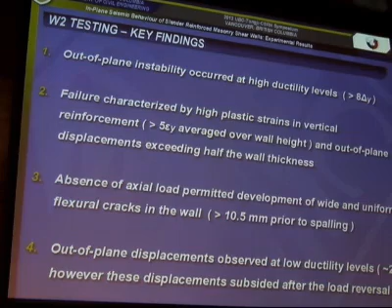So our conclusions are that out-of-plane instability is a possible failure mechanism in reinforced masonry shear walls, and that instability occurs at very high tensile strains, but it must occur over wide and uniform flexural cracks. The applied axial load apparently has a quite significant effect on the failure mechanism.

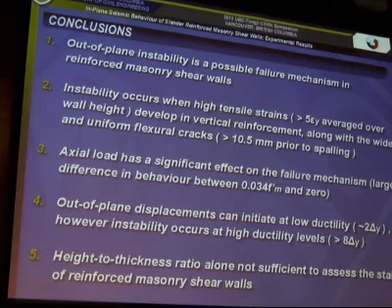Out-of-plane displacements initiate at low ductility levels, but they do not become critical until later on. It is also quite apparent that the height-to-thickness ratio in itself is not sufficient to assess the stability of reinforced masonry shear walls.

So future phases we will possibly be looking at are, again, to further investigate these parameters affecting out-of-plane stability of reinforced masonry shear walls, and also to use these parameters to develop ways to mitigate against this mechanism occurring.

Right now, the next set of tests we could possibly be looking at is determining critical axial stress, which helps prevent this mechanism occurring in these walls, and also to explore the use of better confinement in toe regions, which was found to be very important.

Another one would be looking at different types of reinforcement layouts, which we believe will significantly affect this type of mechanism occurring.

And that's it for that. Yeah.